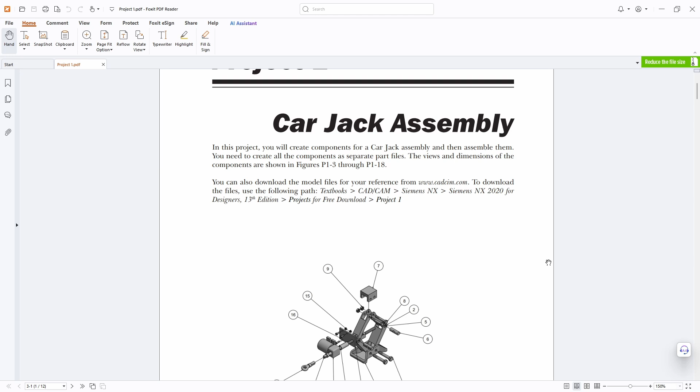Hello, today we'll be continuing on with the car jack assembly. So today we will be building the bolts, item number 8 here.

Let's scroll down, and it is the M10 bolt right here. It's in 2 places, so these 2 bolts right here. All right, let's get started.

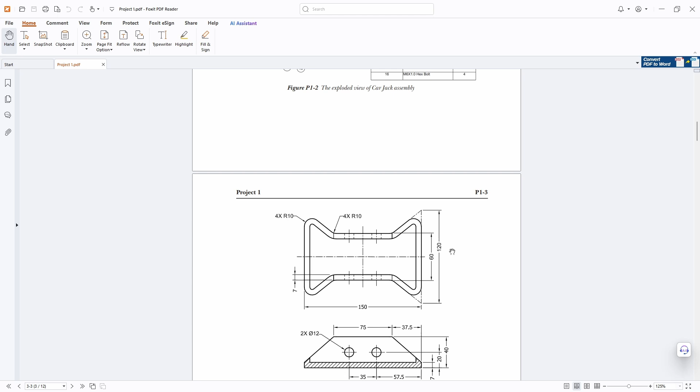So I'm going to scroll through this. We have already completed these, there are videos on these, and they will be in this playlist.

So next we will be doing this bolt right here. P1-13, it's an M10 by 1.5 bolt.

Now, if you don't want to design this, there is the possibility to go to someplace like McMaster-Carr and download this, and it's already completed. You can insert it into your assembly. But if you need the knowledge and you want to build this, then let's do that.

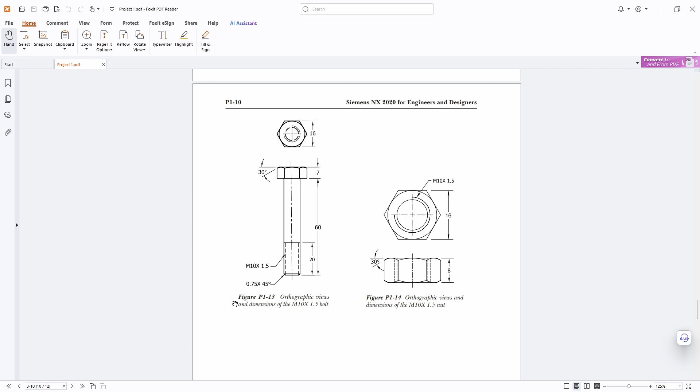So let's get started. Take a screenshot of this, or I will save the location of the PDF in the YouTube description so you can get it that way. I'm going to slide this onto my second screen.

All right, so we're going to go with New. We're going to call this P1-13. So we're going to create a sketch on the Z positive plane.

We're going to go to sketch and click on top. All right, we want to go to polygon, and we want to specify this point right here.

You see how it's clicking a little bit of everything? We can tell it to specify only the existing point. So let's go there, and there's the existing point.

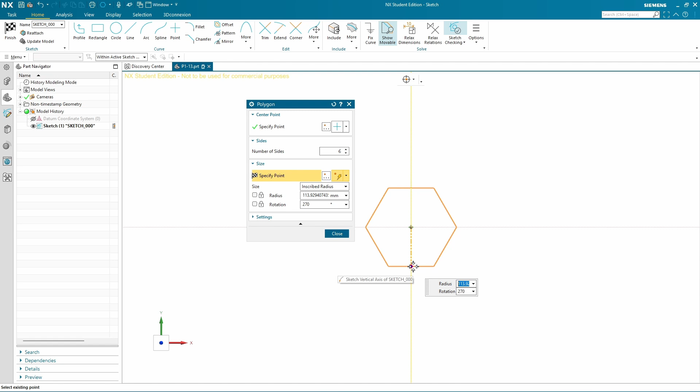Okay, so now we like that 270 number, that's good. So we're going to put this at 270 and lock that in position. Go over here - as soon as you move this, it undoes it. So as you put in that number, go right over here and lock that rotation into place.

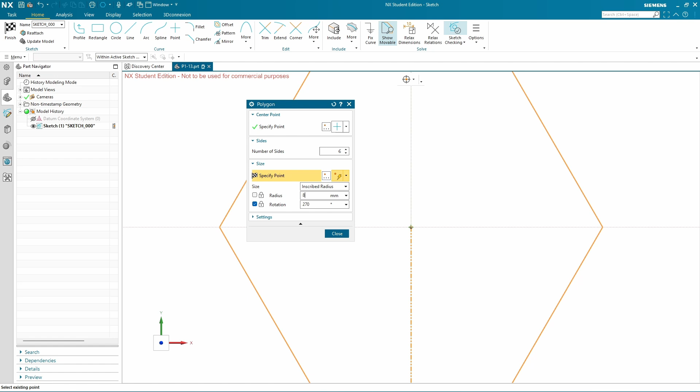Now we can go over here. So we have 16 divided by 2, so let's put 8 millimeters. Lock that in, okay, close. And then we can do a Control F to fit that into our screen.

I'm going to pull this off a little bit. So if I want to pan this, I hit the middle mouse button, the rolly bar, hold it down, and right mouse button to pan that over. There we are, so now we have our size, and let's finish the sketch.

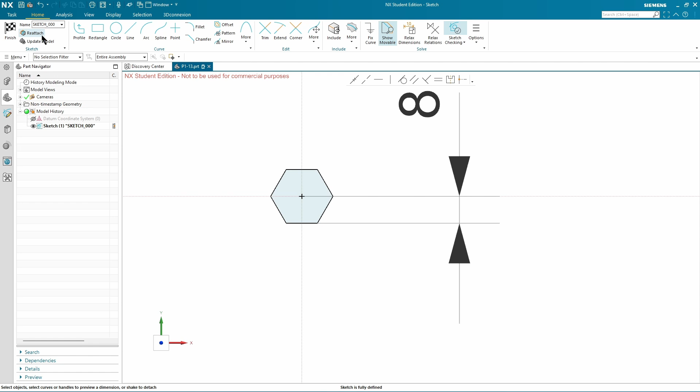All right, so let's extrude off of this. It's already orange, so that means it's selected. So let's choose 7 millimeters. We got no boolean happening - no, it's not going to unite or anything.

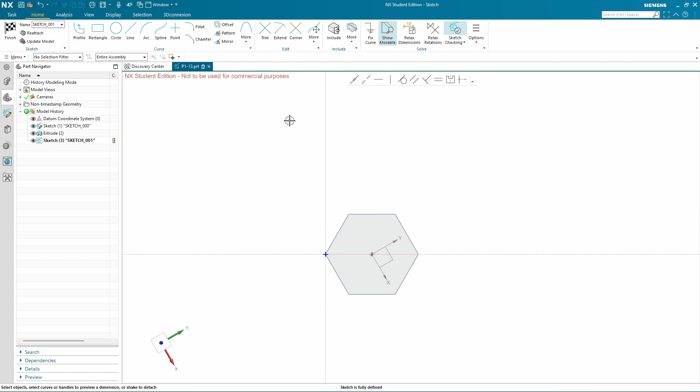All right, so now we need to put a circle on here, and the circle is going to be a 10 millimeter diameter. So we're going to sketch onto this face right here, and we will grab a circle here. Let's choose that center point right there, and then we're going to drag it there.

Escape out of that, click on this guy and then click on that green, and then let's click 10. Okay, enter, escape. All right, we just did that, finish that guy.

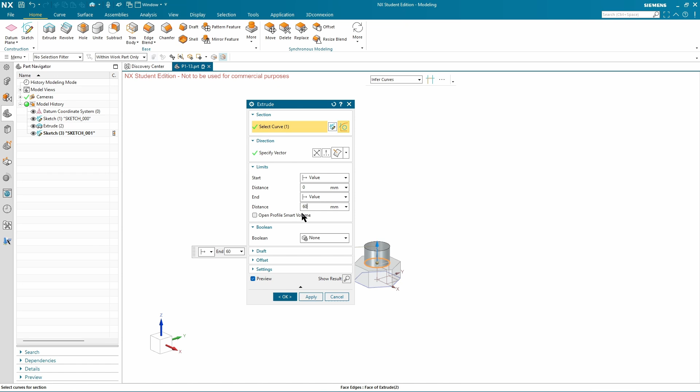And now we can go to extrude. It's already selected - if it's not, you can click on the sketch, or you can click on this round, this diameter, and then do that. So we're going to put in 60 millimeters. Okay, and we're going to say okay.

It's not united it, so what I can do is either go in and unite it afterwards, or I can tell it to do that together. So here's unite - what I would do is click on the target and the tool and then unite those two together. Okay, so that combines them together.

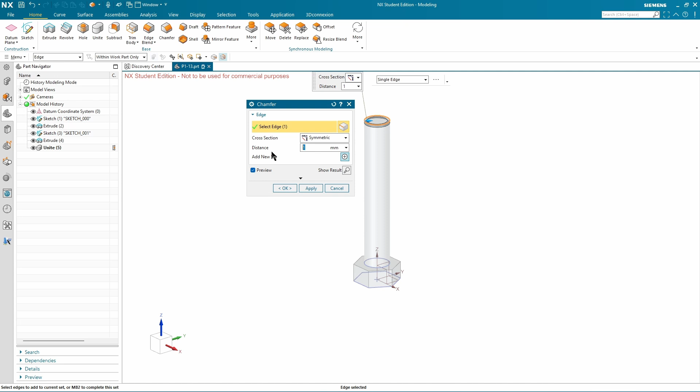So next we need to create our chamfer, our 0.75 chamfer on this edge right now. So let's go there, chamfer. We're going to choose this edge right here, and we're going to go with symmetric, and we're going to put in 0.75. Okay, so now we want to start our threads.

So let's go to more, thread. I recently used it, but here it is in detail feature. So we can click on our cylinder, start object right there - it's already selected. We go down here and we choose whatever size we want.

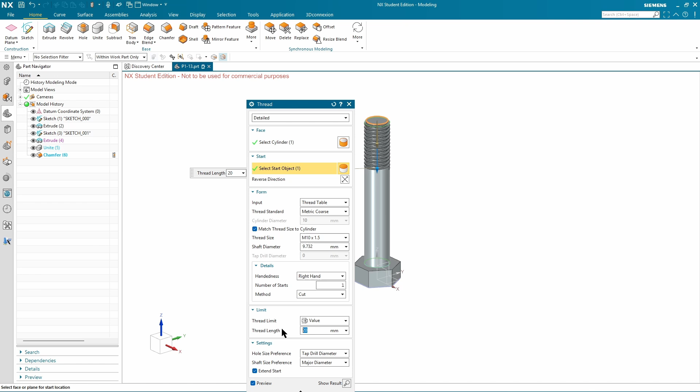So in this case it's 20 - 20 is correct. We can drag this up, let's hit OK box down here. We click on that. All right, we have created our threads.

Now we want to, let's double - yep, that's fine. Let's go and put this little chamfer on this edge right here. So this one, there's a couple ways to do this, but I would say the easiest way is just go to chamfer and let's put in a... asymmetric. I'm going to click on these edges.

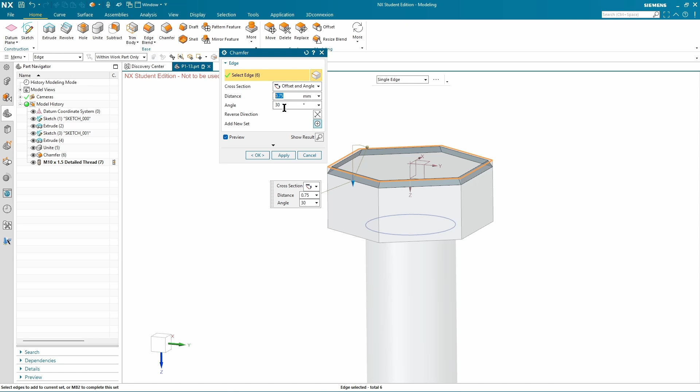And then, I'm sorry, I want offset and angle, and I want to have a 30-degree angle. So that's probably the easiest way to do this.

If you want to do it the way the drawing shows, let me show you the drawing how that looks. And you can see that they only did the corners.

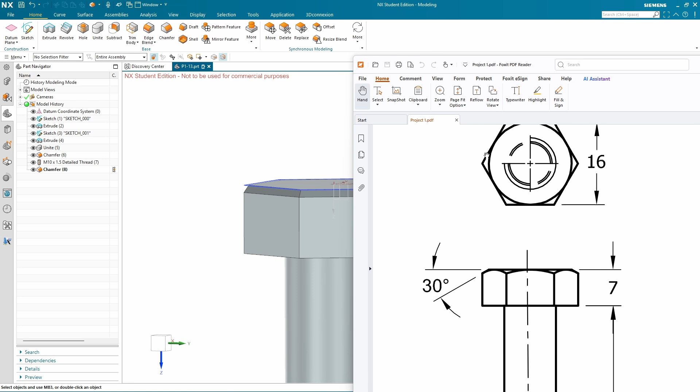See that? It's not a perfectly flat line against here, not a straight line. So that's telling me that they extruded something off of this. If you want that, this is how you do that.

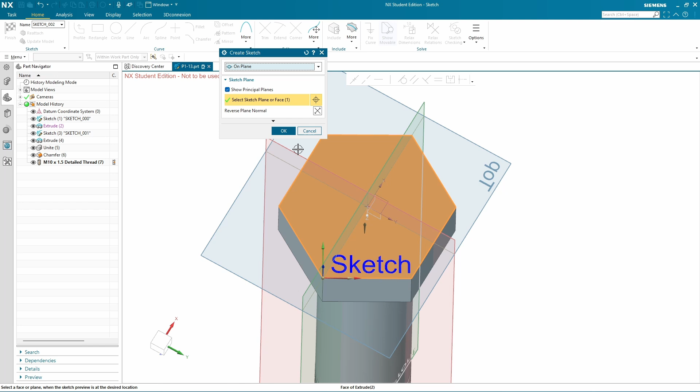Click on this chamfer, we'll delete this guy. Delete. Now we want to put a circle on the back here. Let's do a sketch, click on this face right here first. Now we'll do a circle, center point, and click it out to there so it's tangent to point on curve, that's fine.

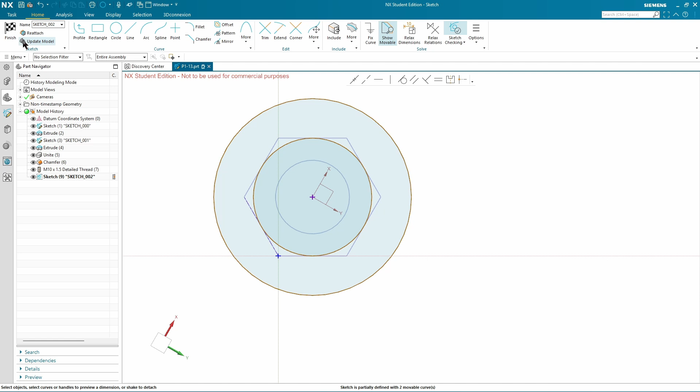Close that guy. Now we want to create one more circle, just anything bigger, doesn't have to have a size, really, just bigger. All right, finish this. So now we got two circles.

Now we're going to extrude these two circles, and we're going to flip that direction right here, and go with, let's say, 7 millimeters. No Boolean. Got it?

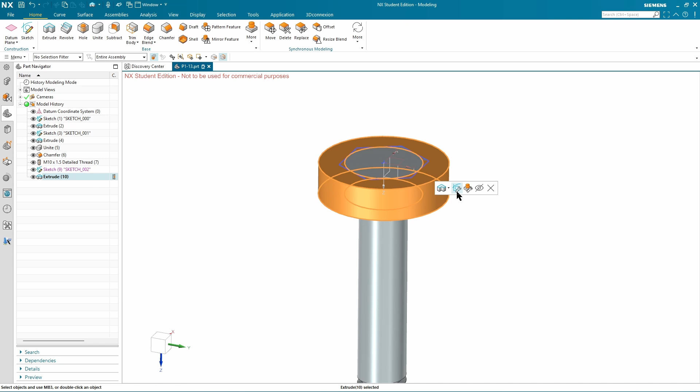All right, so now I want to hide this bolt. Let me click on left click and little eyeball, let's hide that. Oh, undo that, I want to hide this guy instead. So left click, eyeball. Okay.

Now we want to concentrate on this shape right here, so we want to add a draft to this inner shape. It's going to be going in the positive Z direction, so let's choose positive Z as our vector. There's positive Z. We're going to choose our stationary point, our face right here, and we'll choose our face to draft right here.

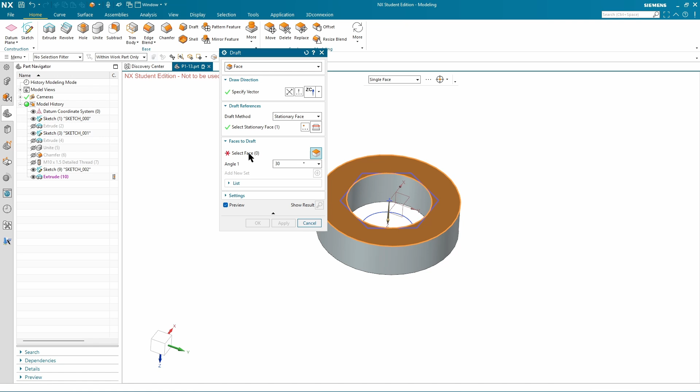And we will choose our size. So originally it said 30 degrees, but when we take that dimension, we actually need this to be 60. So there we are, let's click OK. So that's the shape we want to subtract from that bolt.

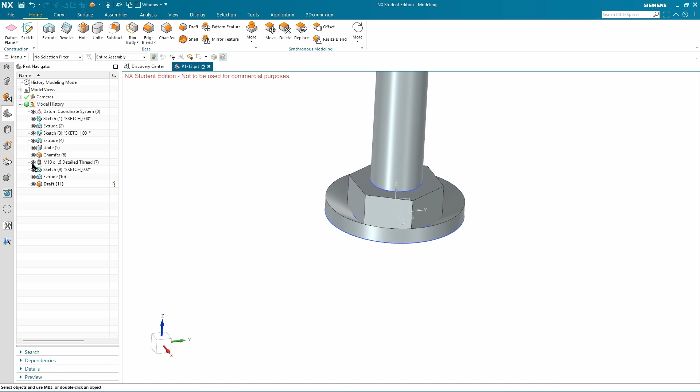And where did our bolt go? Well, we go over here and we should be able to find our bolt. Let's click on the little eyeball. The bolt pops back, see, its shape is there.

Now we will do a subtraction. So let's go subtract, and let's click on our target, our tool. Okay, and there we are. Now we have that shape that was on the print. A little more complex, probably doesn't need to be done like that, but anyway.

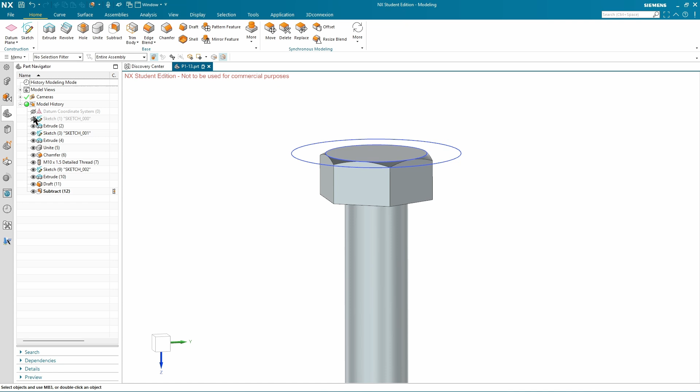So we will continue on with this, and we will start drafting. But let's go in over here and hide our sketches and our datum coordinate system. Sketch, sketch, sketch, and everything's all good.

We're going to go to file, drafting. A3 is good, okay, close. And it threw it down, so that's good. We're going to throw it here, and then we're going to drop it down here.

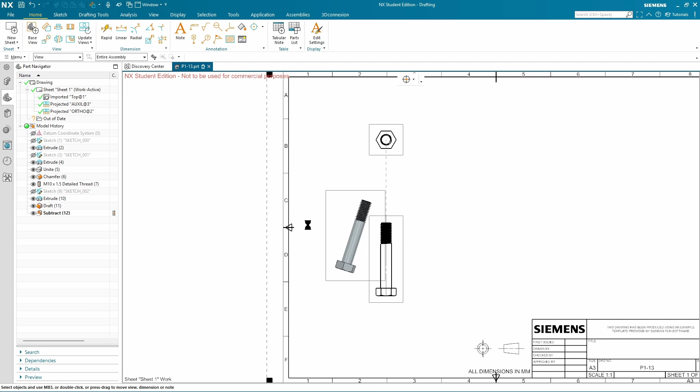We can do a rotation of this in a second. Click close, we're going to double click on this guy. We're going to go to angle, actually, I'm going to change this to 180. 180, okay, say okay, and it will flip.

Let's delete this guy, left click, delete. And let's do a projected view right here. Projected view, grab that guy, grab this. It automatically already chose this, so I'm just going to drag it up.

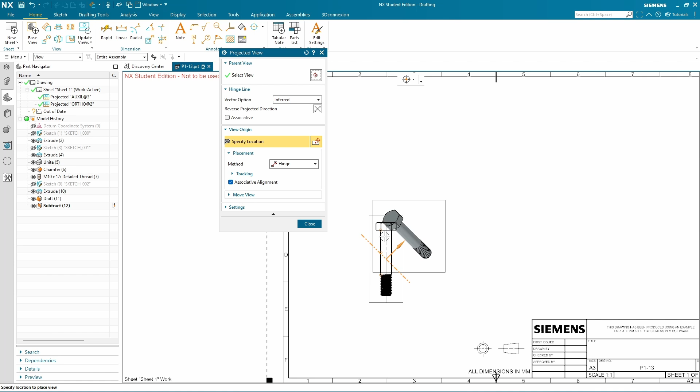Close. And we see how we don't see the invisible lines. So let's double click on this guy, let's click hidden lines, invisible, dashed. Okay, now we see all those lines inside.

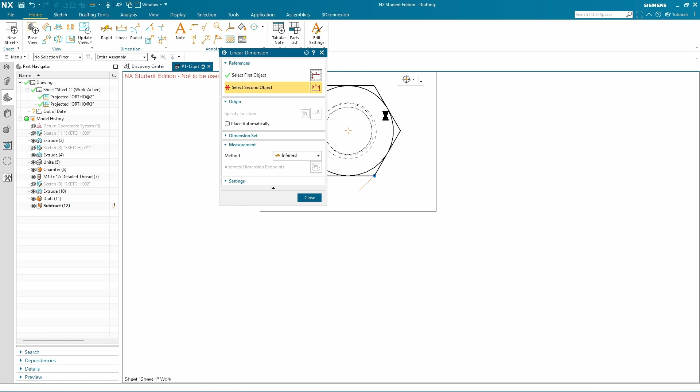All right, so now let's dimension this guy. Let's go here, let's grab this edge to this edge, 16. Now we got 7, so here to here, 7. Then we got 60 from here to here.

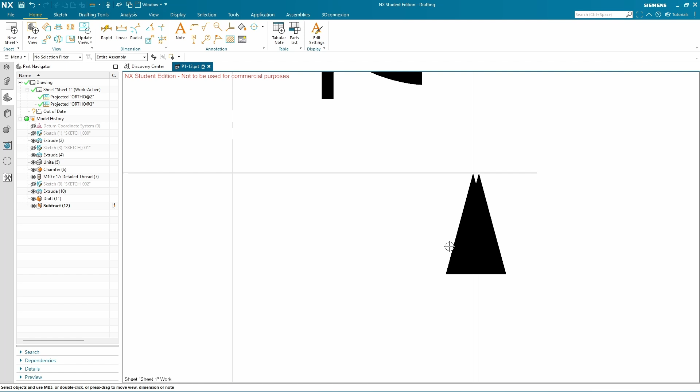Okay, and it just kind of snapped there. If you don't want it to snap, you can hold down the Alt key and it will not snap anymore. But we could put it as close as we want there, okay?

So now let's go with 20 millimeters here. So from here to here, 20. And then we can put our

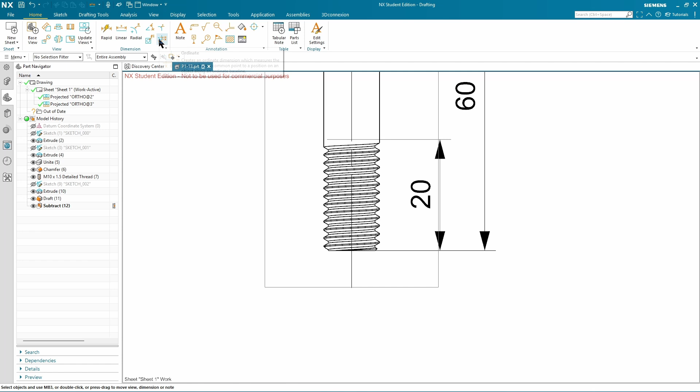hole thread call out. Should be able to click on something down here. Now, yeah, this one. Doesn't seem to work, it doesn't seem to select anything. All right, so what we will do is we will just do a manual call out.

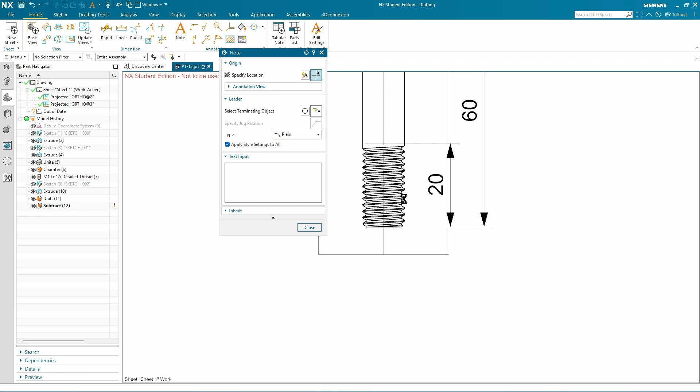If you do this with symbolic, meaning a symbolic thread, I can show you in a second what symbolic means. So we can go with M10 by 1.5, and then we can just drag in off of that. That's how you do that one.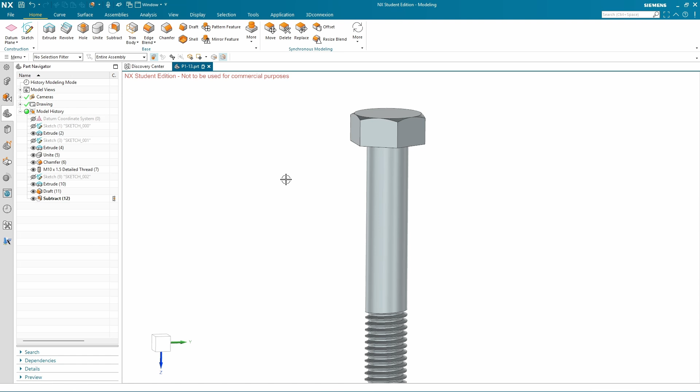Now, if you want symbolic thread, what we do is we go back to modeling, M for modeling. We go to our detailed thread, we double click on that guy, all right, we will change this to symbolic. And what this does is it changes it so that there's not as much detail inside that thread.

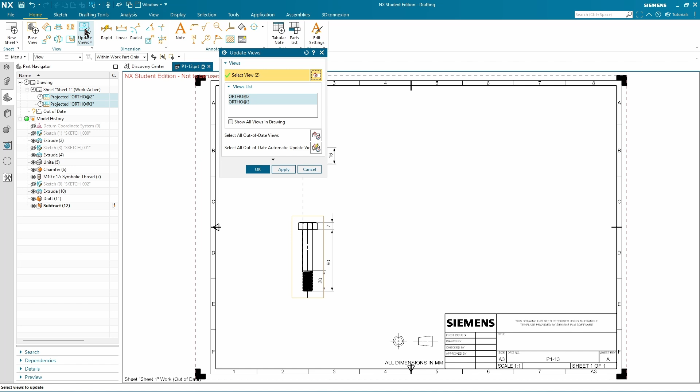Okay, let's go to Control-Shift-D for drafting. We're out of date here, we need to go update. Let's click on that guy, click OK. We can see that now we have this new representation. So that's a symbolic thread.

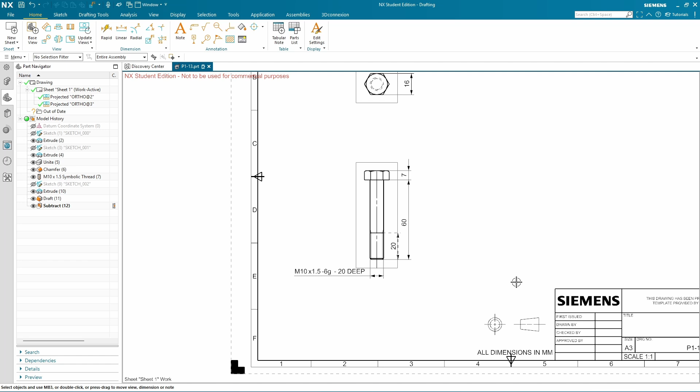All right, and if we want to click over here to hole and thread call out, click on that guy, click on this guy, and then all of a sudden it pops up. There we are, so it tells you all the information you want, and you don't need that one anymore. So let's put our last dimension, and that is a chamfer on the edge there.

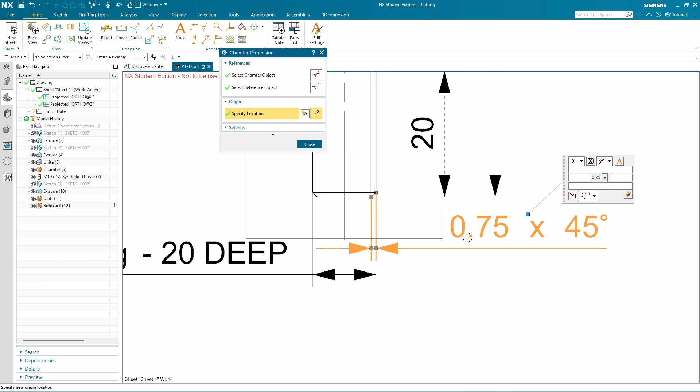So we can hit this little C right here. I don't know if it's gonna, okay, it did. So this one is actually saying 0.8 by 45, it's rounding up, so we just double click on that guy, and we can choose this guy, I think. Yeah, 2 places, there we are. So that's why it was showing smaller.

All right, so there we are. And that concludes the M10 by 1.5 bolt.